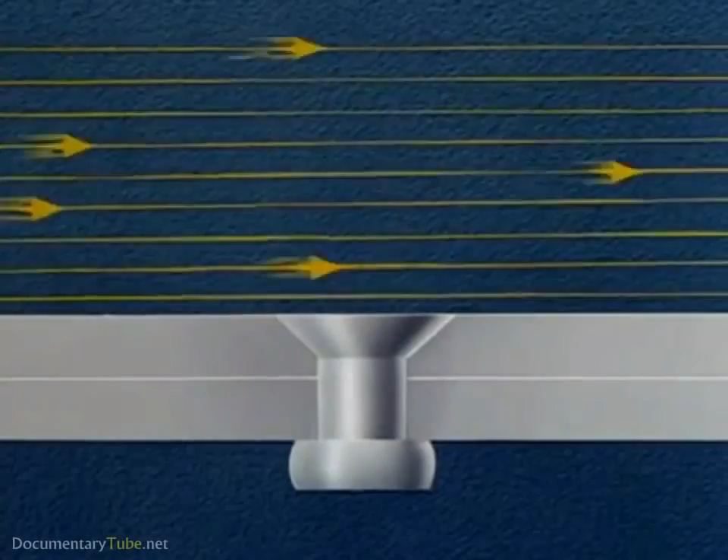Every possible projection from the outer surface of the airplane, everything that would induce turbulence with its attendant drag, must be reduced to a minimum. The use of a rivet whose head is flush with the surface being riveted eliminates the drag of the ordinary rivet head and thus aids in accomplishing our higher speeds.

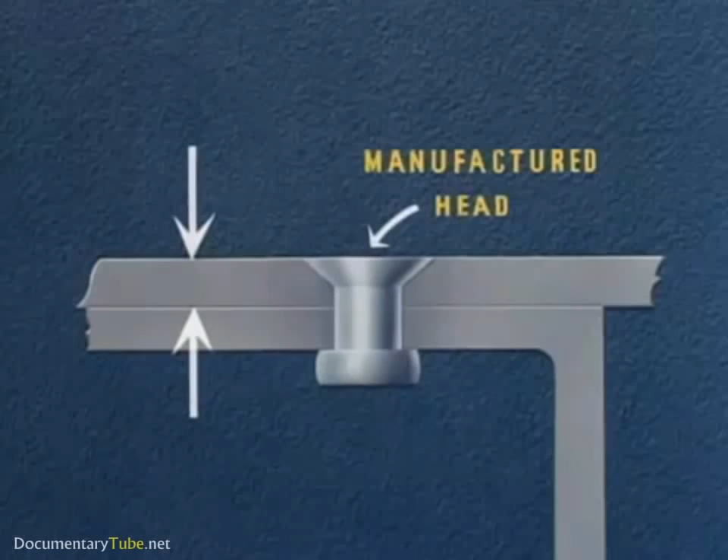The choice of method to be used in flush riveting is based on the thickness of the sheet next to the manufactured head. Let's assume we're driving a rivet 1/8 inch in diameter with a 100-degree countersunk head. Probably the best production method involves sheets of 40 thousandths thickness or greater.

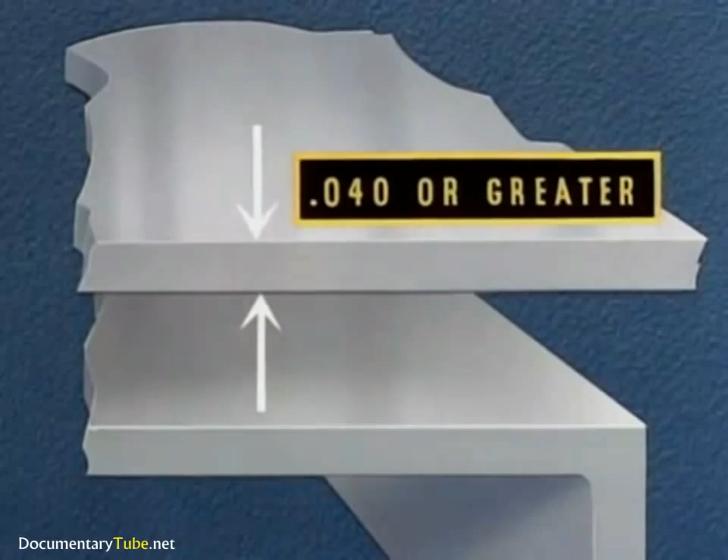We start with the assembly of the sheets, drilling the correct size hole for the given rivet. We're using a 1/8 inch rivet, so we drill a number 30 hole, then countersink, using a special countersinking tool with a 2-flute cutter and with a 100-degree cutting angle and number 30 pilot.

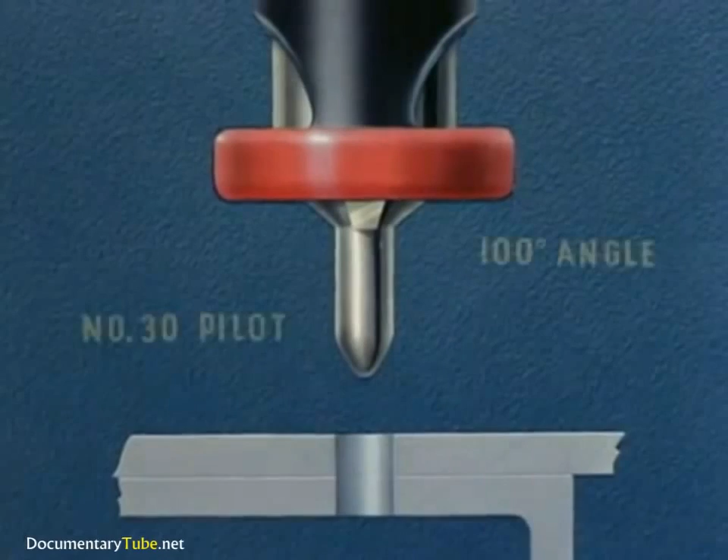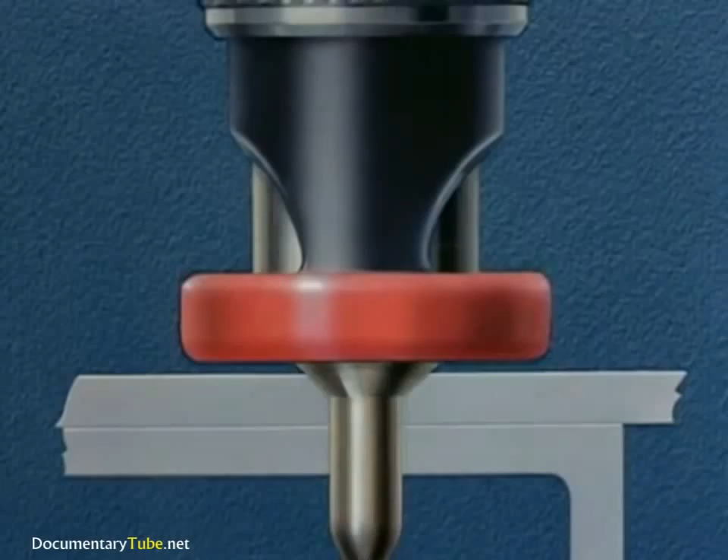Unless specific approval has been obtained from the stress engineer, the countersinking should not go through the first sheet. If sheets are properly clamped during countersinking, it is not necessary to disassemble them for deburring, which is a costly operation.

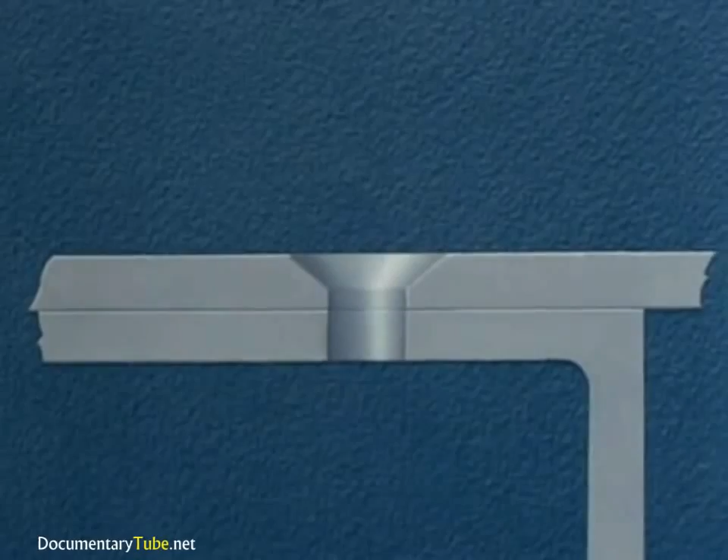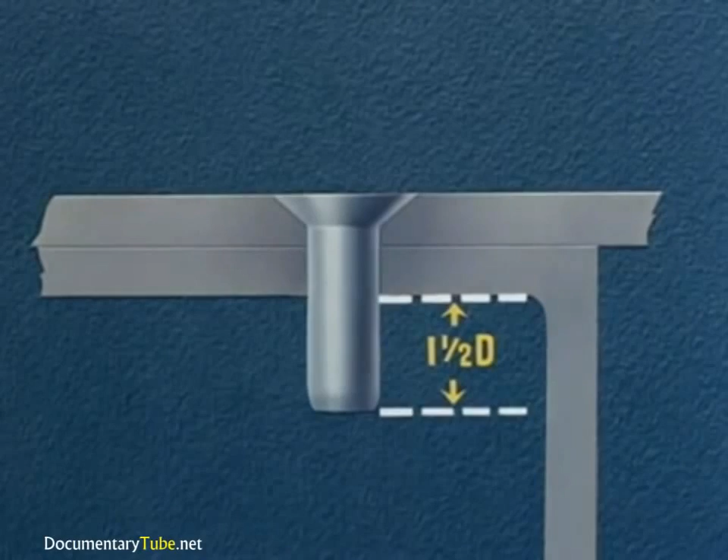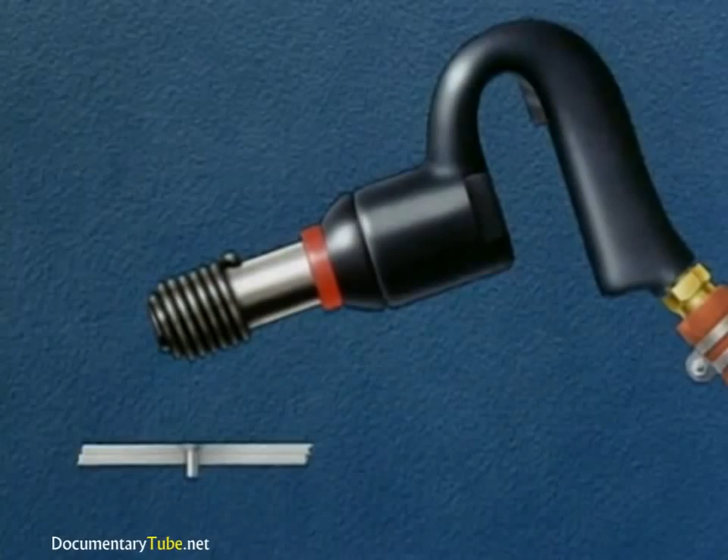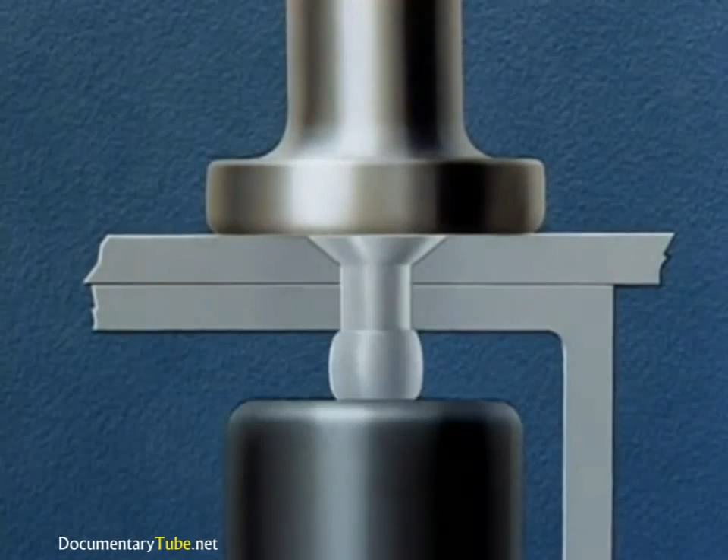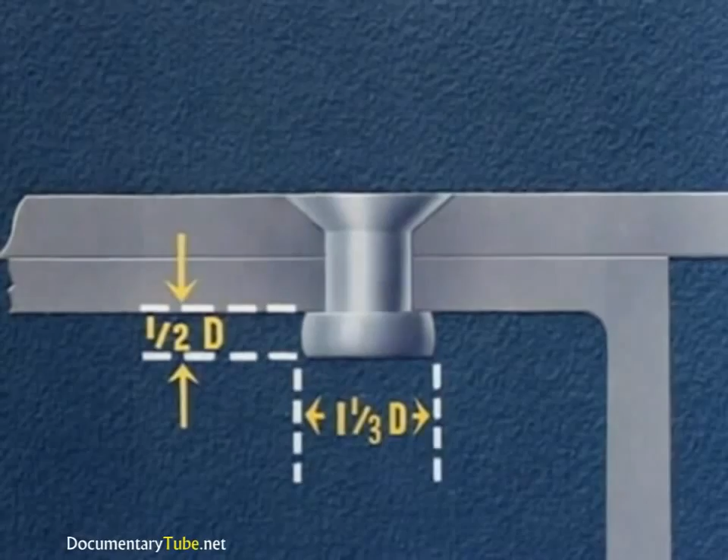A vibrating type air gun with a flush rivet set and a regular bucking bar may be used. Ordinary riveting technique will do for driving of this type rivet. The finished rivet should have a formed head, 1 1/3 times the diameter of the rivet and about 1/2 the diameter high.

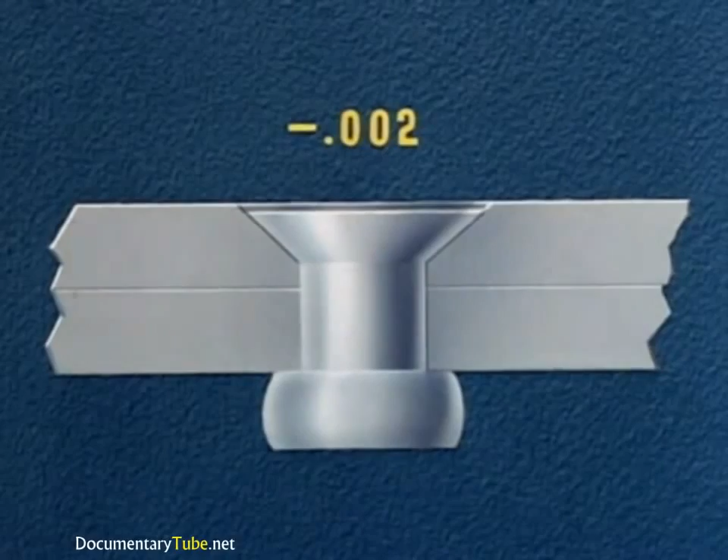The flushness of the rivet, as determined by aerodynamics, must run in the neighborhood of plus or minus 2 thousandths. We have just demonstrated the countersink method of riveting. This is a method used when both sheets are over 40 thousandths in thickness.

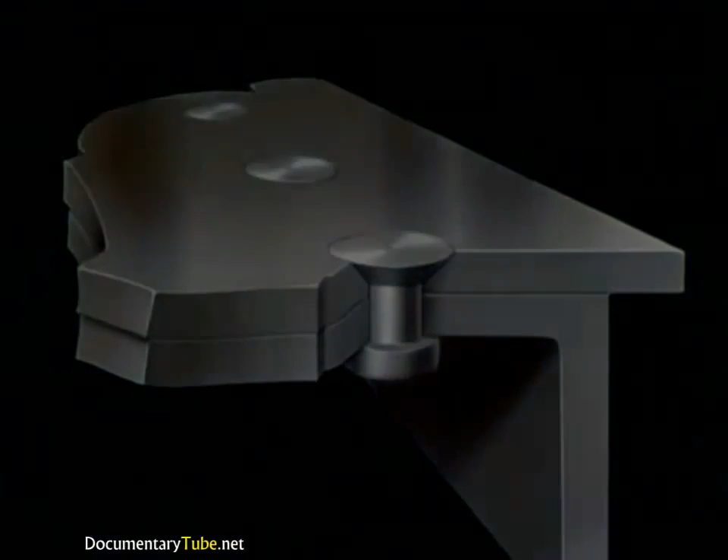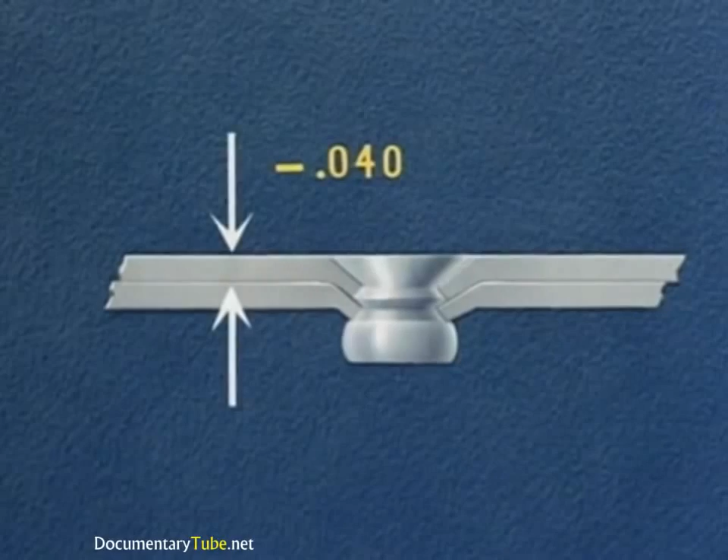Structural requirements make it necessary to dimple the sheet next to the manufactured head if this sheet is under 40 thousandths in thickness. This double dimple method is used for flush riveting thin sheets.

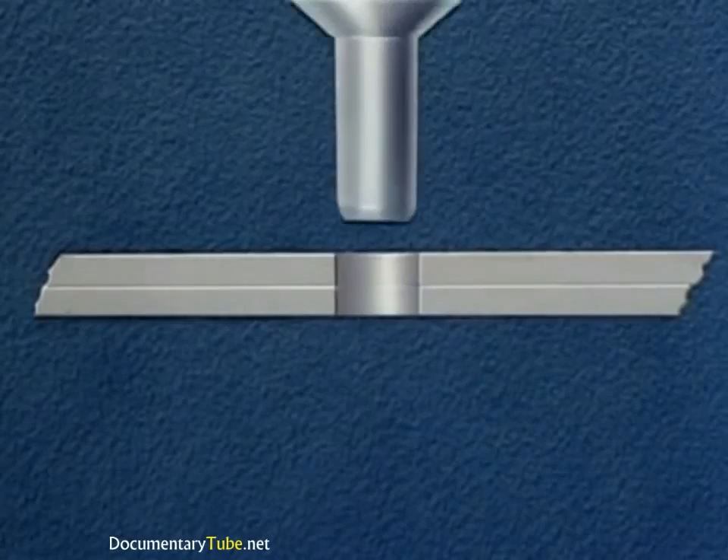Here again, we start with the number 30 hole and follow this with insertion of the rivet. The length of the rivet is again the thickness of the material plus 1 1/2 times the rivet's diameter.

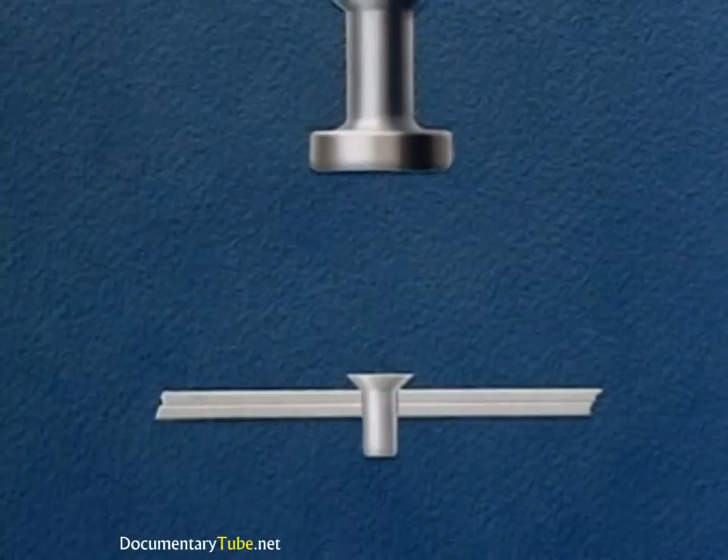The driver uses a standard flush rivet set. The bucker uses a special dimpling set that has been adjusted by the tool department to give the correct angle and depth of the dimple.

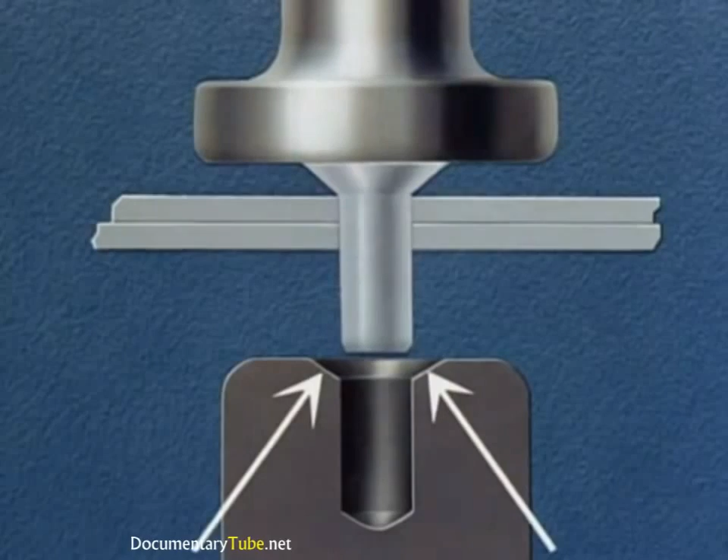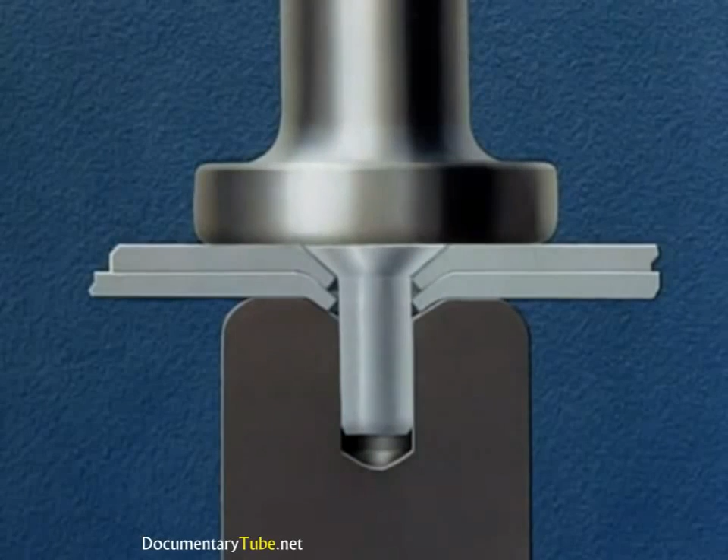Using the rivet as a punch, we dimple the two sheets together into the dimpling set. The special dimpling set is removed. The driver retains the standard flush driving set. The work then proceeds with the bucker using an ordinary bucking bar.

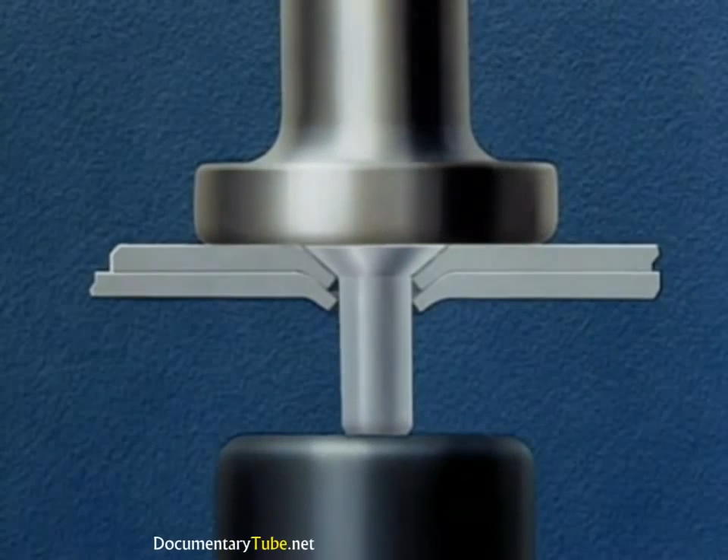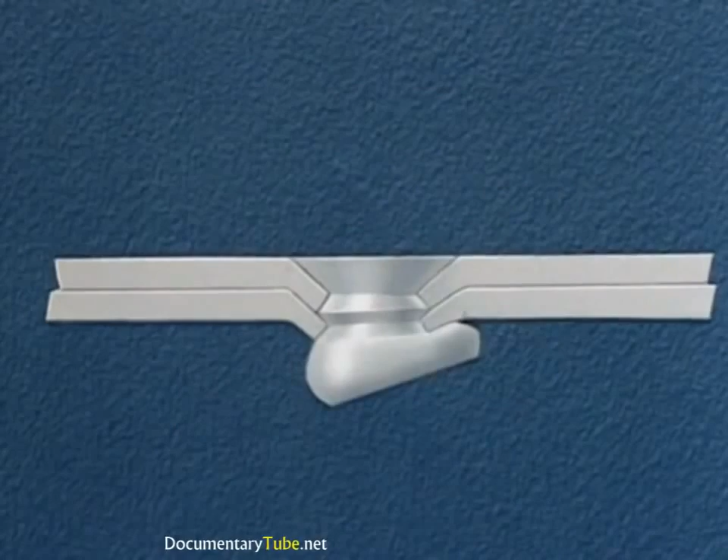Driving this type of rivet requires greater skill than was required in the previous method. Any clinching or offset of the rivet will cause the dimpled edge to crack. The rivet must be driven straight.

We have just shown the double dimple method of riveting. This is one of the methods used when both sheets total 40 thousandths or less in thickness.

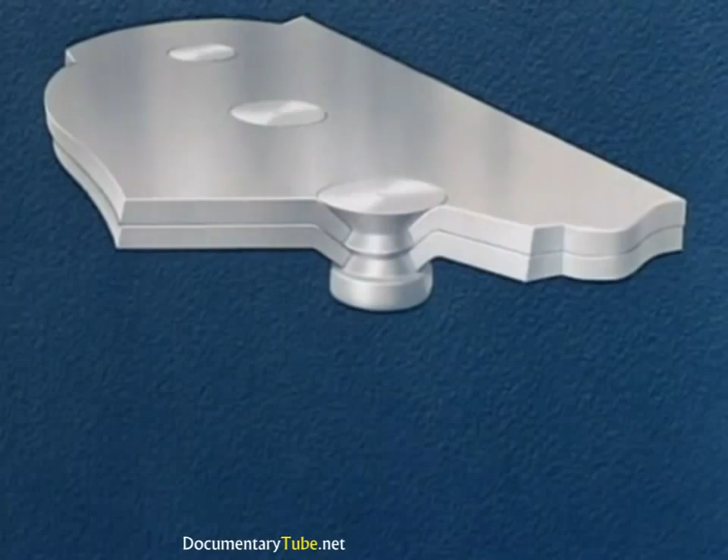A third method, used for riveting of slightly heavier gauges than in the last method, involves a separate dimpling of the sheets. Again, we start by drilling our number 30 hole.

The sheets are then disassembled and machine dimpled separately on the squeezer. Note the angle of the dimpling tools. The dimpling punch for the top sheet has an angle of 100 degrees, the same as the rivet head. The dimpling die has an angle of 110 degrees.

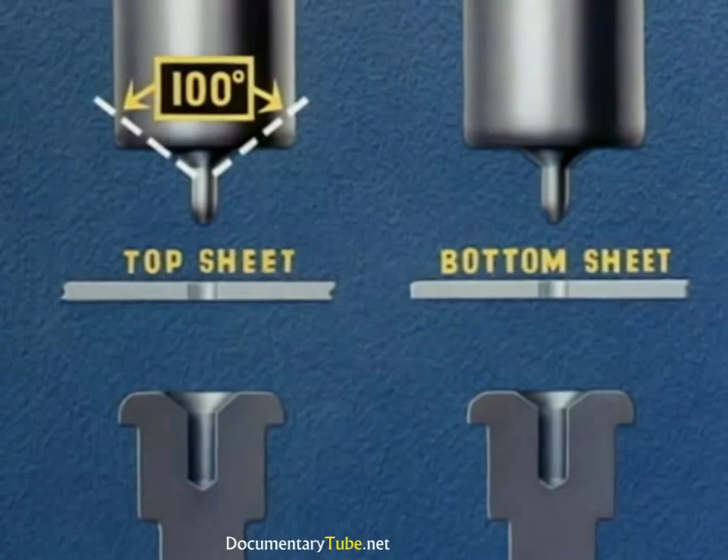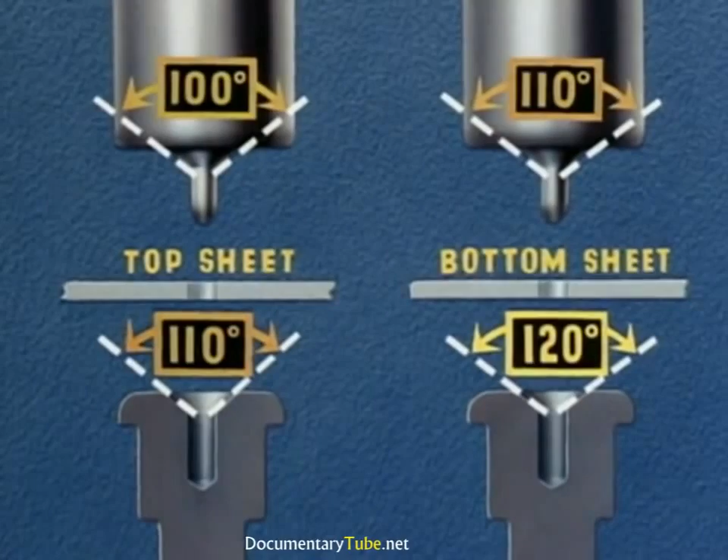The dimpling punch for the bottom sheet is also 110 degrees to correspond with the top sheet, and the dimpling die is 120 degrees. This difference is necessary in order to get a good nesting of parts. Upon completion of the dimpling operation, the parts are reassembled.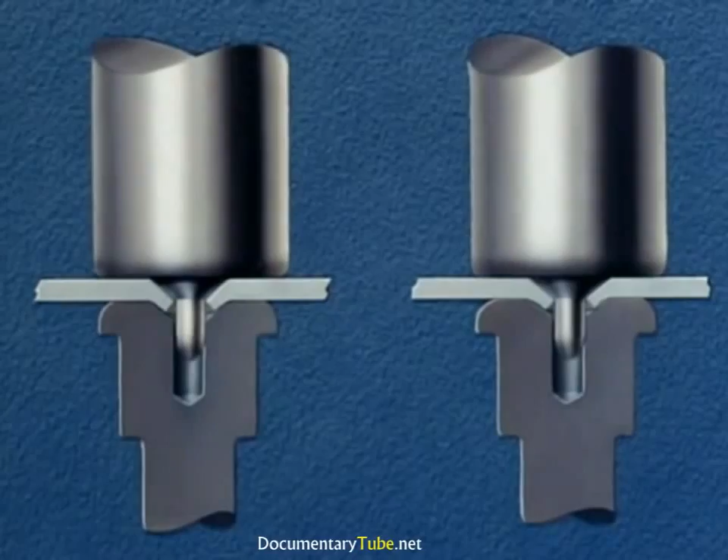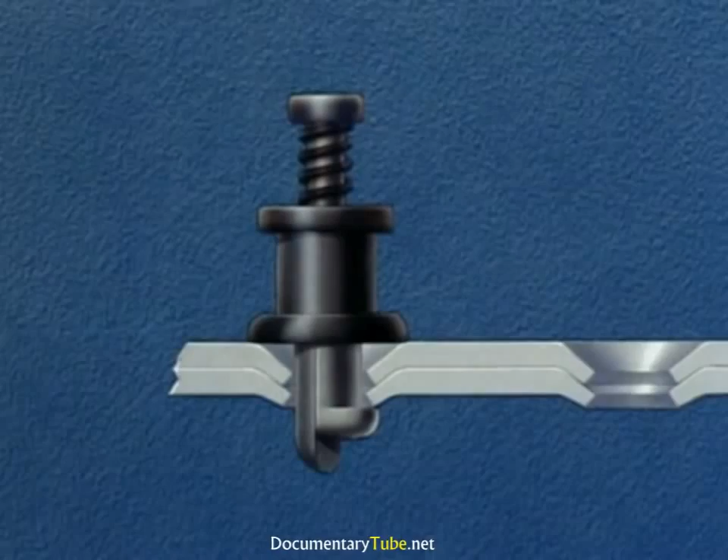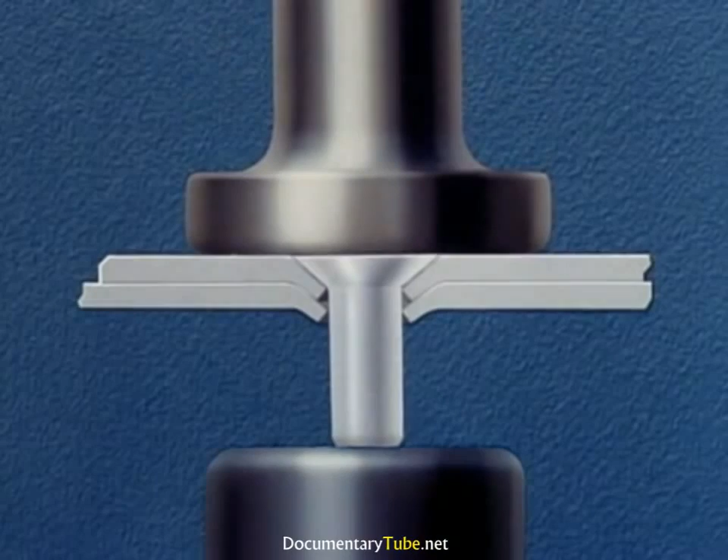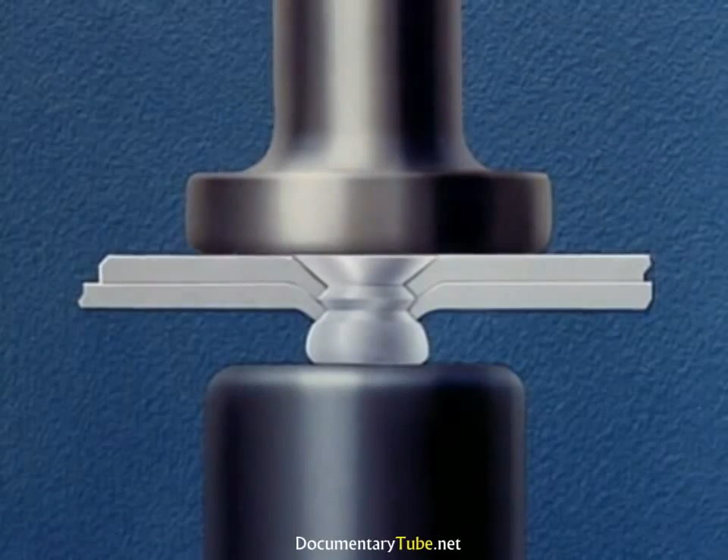Sheet metal riveting clamps are used to hold the parts together until riveting is completed. The rivet is inserted, and from here on the work proceeds using a regular flush riveting set and the ordinary bucking bar. Driving this type of rivet requires the same skill on the part of the operator as in the former dimpled method. It is very important that the rivet be driven straight.

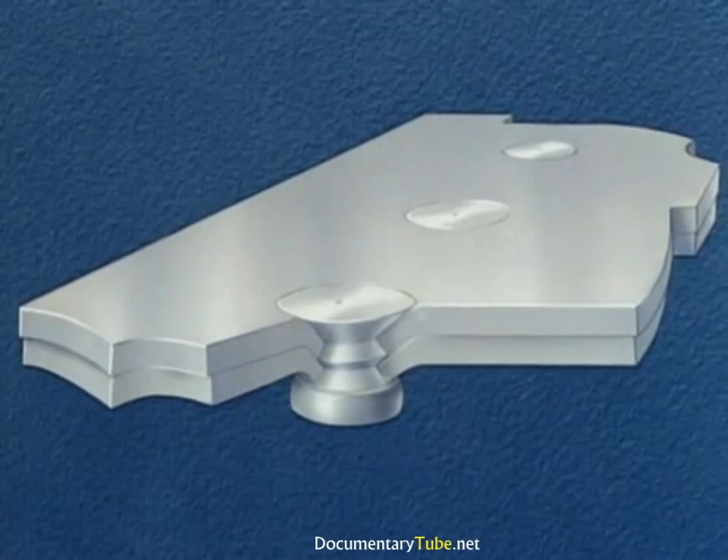We have just illustrated the pre-dimple method of riveting. The sheets were taken apart and machine dimpled separately on the squeezer. This is a method used when the sheets are too heavy for the double dimple process.

For sheet gauges where the top sheet is too thin to countersink and the bottom sheet too thick to dimple, we must use a combination of pre-dimpling and countersinking. The top sheet, being under 40 thousandths, must be dimpled. The bottom sheet, being over 40 thousandths, will be countersunk.

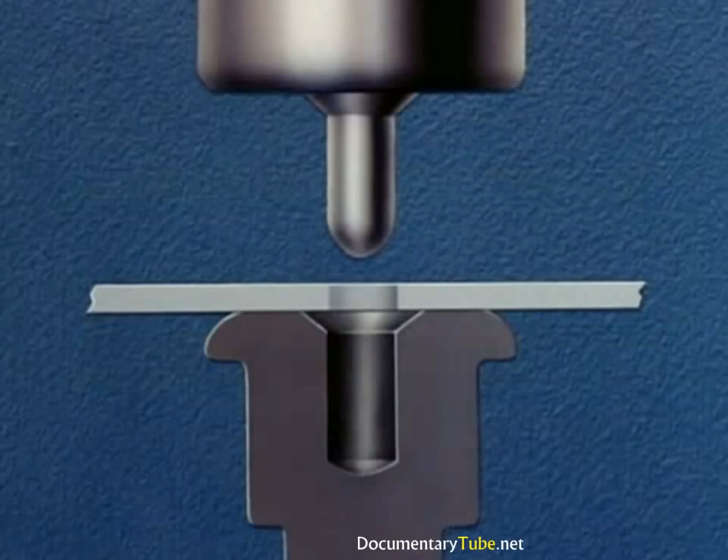Again, we start by drilling a number 30 hole. Sheets are disassembled and the upper sheet is machine dimpled using special dimpling tools on a squeezer-type machine. The bottom sheet is countersunk using the special countersinking tool.

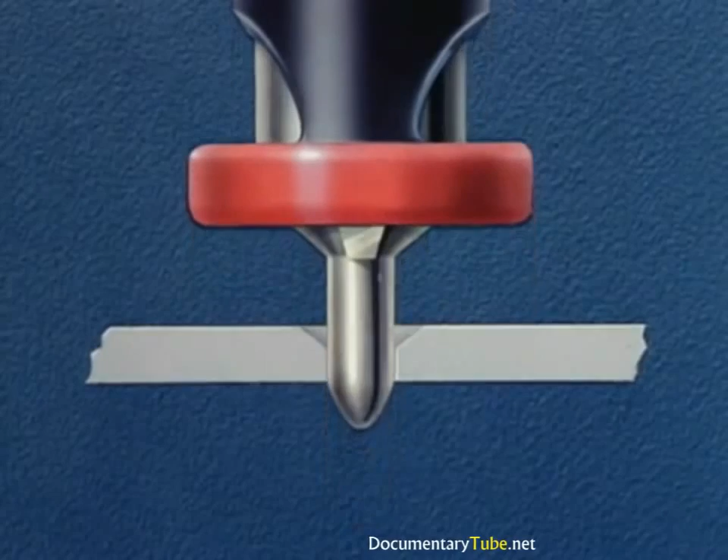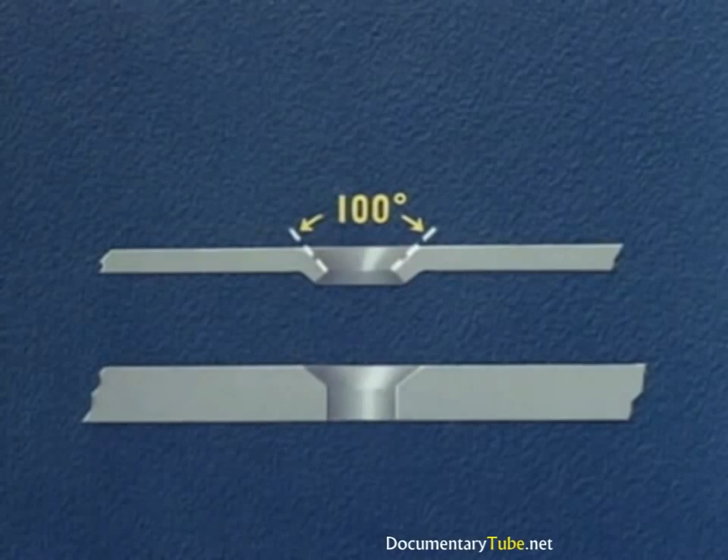The angles of the dimple and countersink are very important. The angle of the dimple next to the rivet must be 100 degrees because the rivet head is 100 degrees. The angle on the opposite side of the sheet is 110 degrees. The angle of the countersink is also 110 degrees.

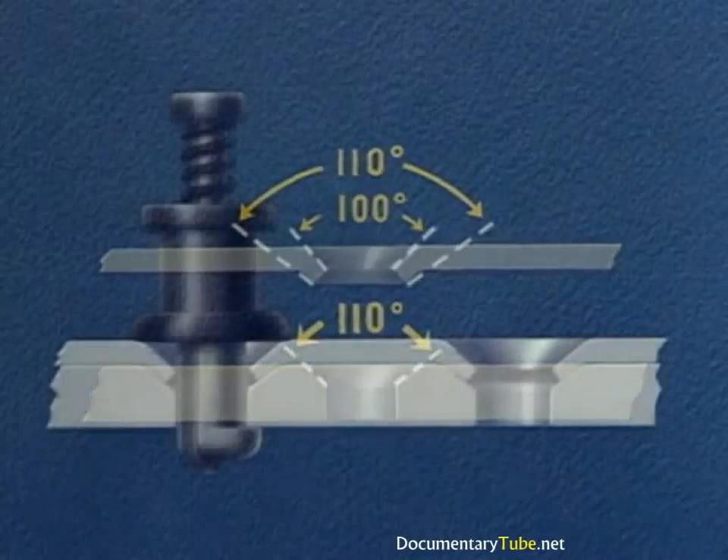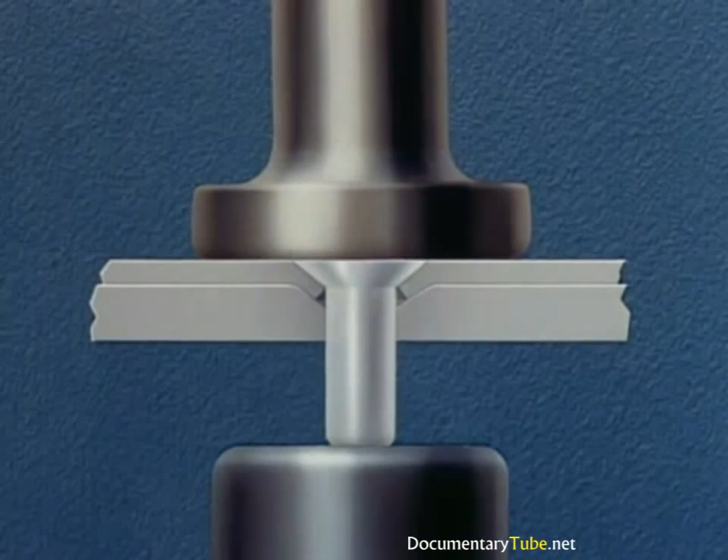Parts are reassembled using sheet metal clamps. The rivet is inserted, followed by driving the rivet using a standard flush driving set and bucking bar. This riveting technique is fairly simple because there is no lip on the under sheet to cause cracking or failure from clincher rivets.

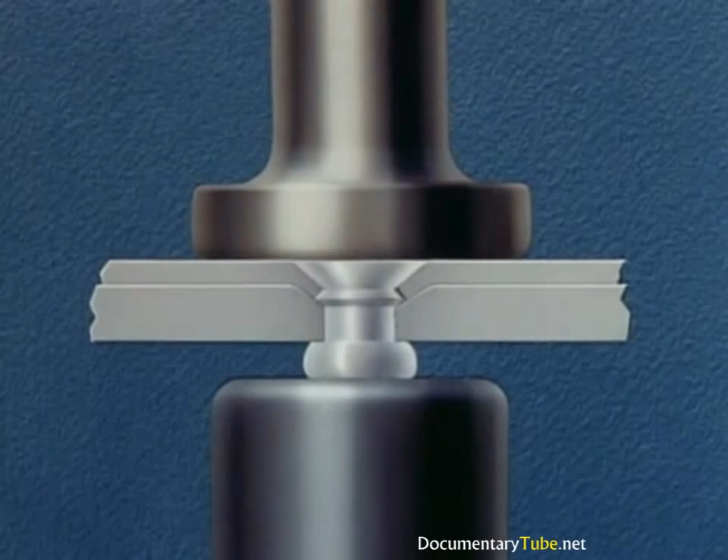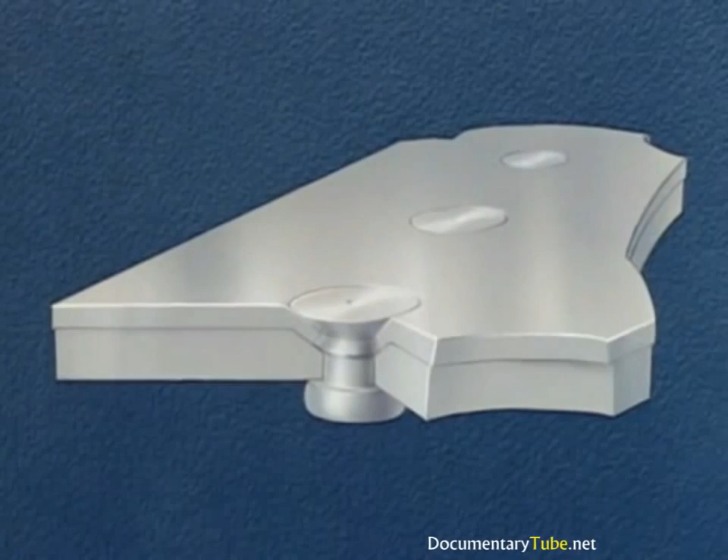We have just demonstrated the combined countersink and dimple method of flush riveting. This combination is used in cases where the sheet next to the rivet's manufactured head is too thin to be countersunk and the bottom sheet is too thick to be dimpled.

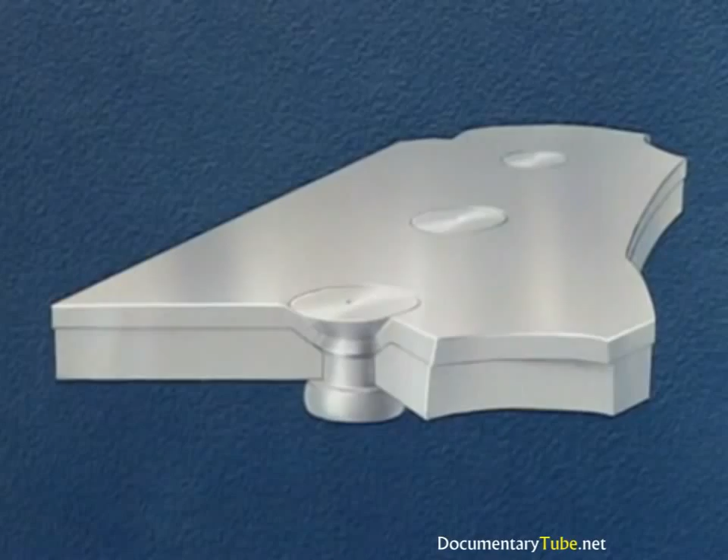Now let's review the four methods of flush riveting just demonstrated. Countersinking, used when the top sheet is 40 thousandths thickness or greater. The flushness of the rivet is obtained by setting it into a hole countersunk by a special tool.

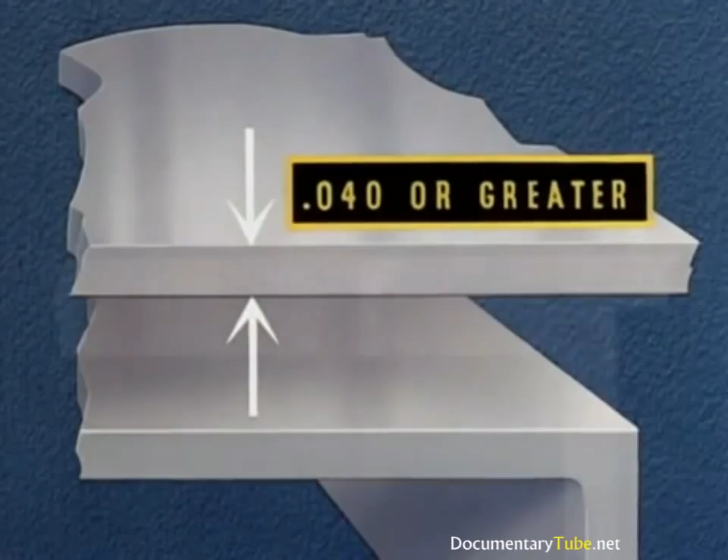Double dimpling, used when the total thickness of the sheets being riveted is 40 thousandths or less. In this method, the flushness of the rivet is obtained by using the rivet itself as the punch to form the dimple.

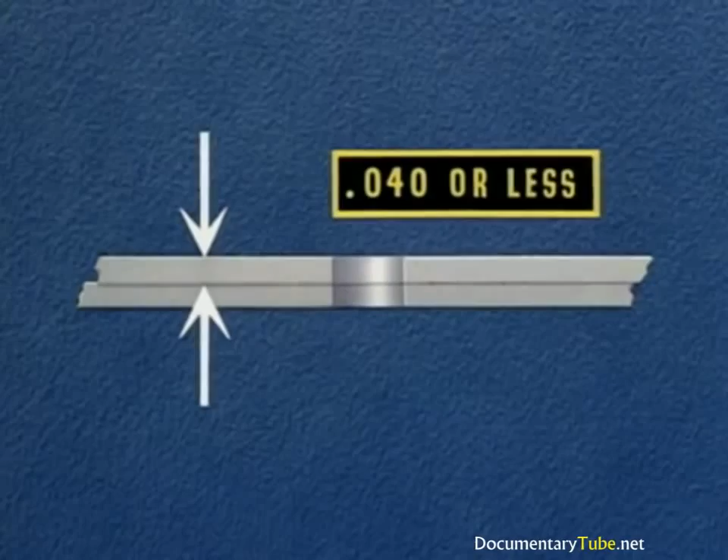Pre-dimpling, used when the top sheet is 40 thousandths or less, and the total thickness of both sheets is over 40 thousandths and under 90 thousandths. The flushness of the rivet is obtained by setting it into a dimple formed mechanically on a squeezer.

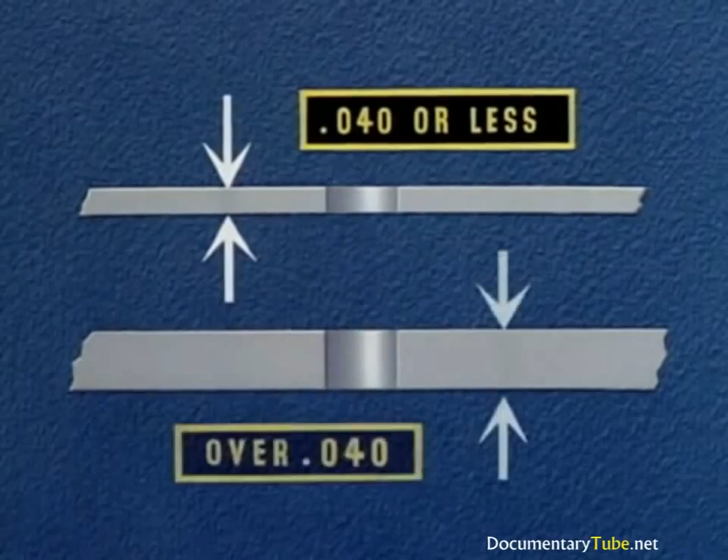Combination countersinking and dimpling, used when the top sheet is too thin to countersink and the bottom sheet is too thick to dimple. The top sheet is dimpled and the bottom sheet is countersunk.

The result obtained by each of these different methods is the same. The head of the rivet is flush with the surface so that the turbulence or drag is held to a minimum.

With the ever-increasing demand for greater speeds in aircraft, it has been necessary to remove every possible projection from the outer surface of the airplane. Everything that would induce turbulence with its attendant drag must be reduced to a minimum. The use of a rivet whose head is flush with the surface being riveted eliminates the drag of the ordinary rivet head and thus aids in achieving